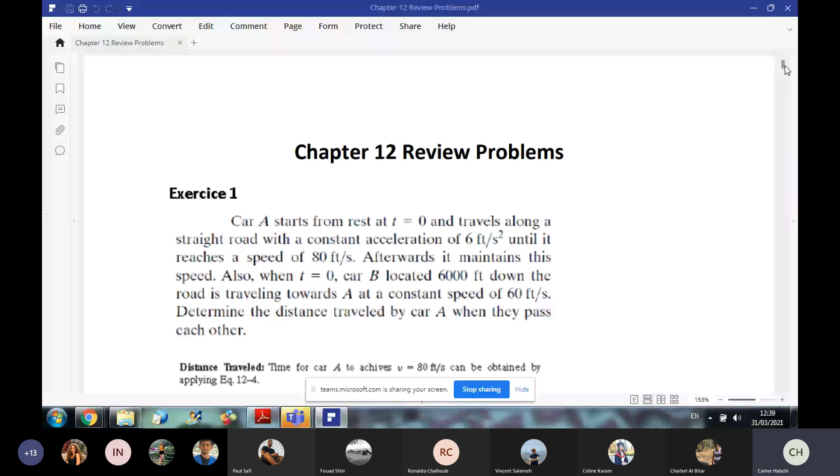So I will repeat the problem because we had a problem in connection. The screen was not sharing. So I will repeat in brief what we did last time. So we were doing problem 10.

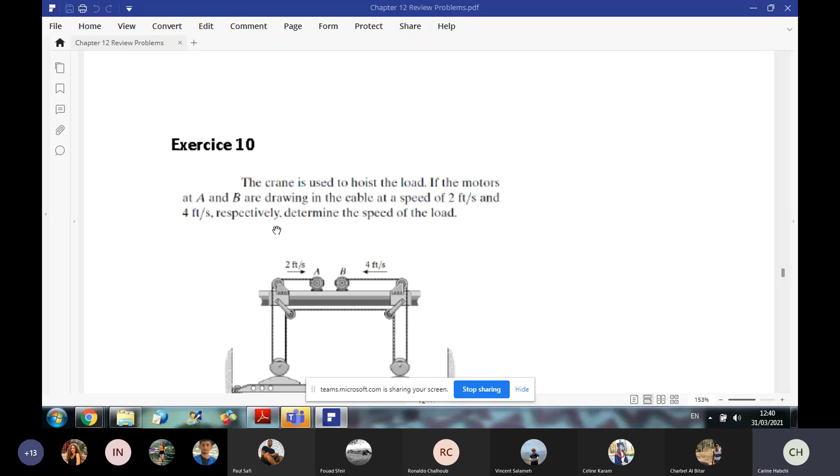The crane is used to hoist the load. If the motors at A and B are drawing in the cable at a speed of 2 feet per second and 4 feet per second respectively, determine the speed of the load. So here we have a system of pulleys with their cables, okay? And we have two motors drawing the cable in, motor A and motor B.

So here we need several coordinates. First, whenever you have a motor, you need one coordinate for the motor. Since it's drawing the cable inside, I will take the coordinate from a fixed reference towards the motor. Then this coordinate will represent the length that is going inside the motor. And I need also a coordinate for B, SB, to give me the length that is going inside motor B.

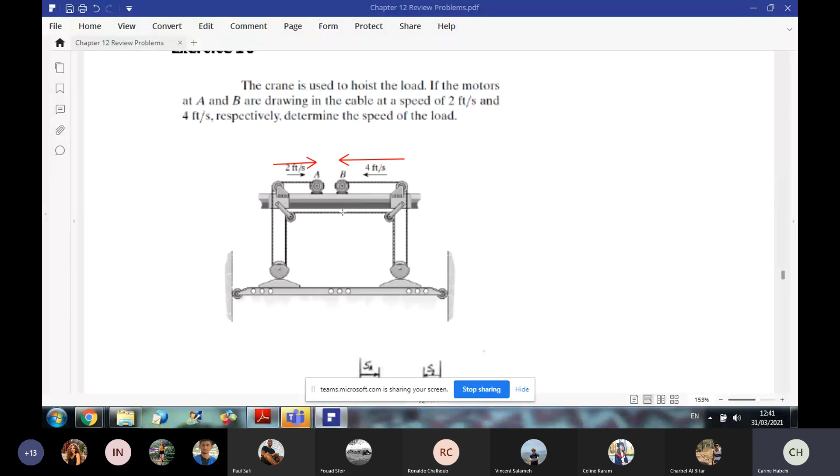And for the load, I need a coordinate. So I will take this coordinate for the load, okay? And I will name my coordinates as S of A, S of B, and for the load, I will call it C. So this is S of C, okay? Now, if I want to find the total length of the cord, I will express it as a function of my coordinates, and I will lump all constants in one term.

So the length that is rolling in the motor, this part, is SA. So first I will write SA plus... this part is a constant, so I will keep it with the constants. This is SC. This is a constant. This is SC a second time, so here I have plus 2SC. This part is a constant. And here I have SC again, a constant, and SC a fourth time, so I will update the coefficient. It is plus 4SC.

And this part here is a constant. And finally, I have this length plus what is going inside the motor. This is SB. So plus SB equals a constant. Now, once I derive this relation, I can get a relation between velocities and a relation between displacements. Because as we have seen last time, if you derive this relation, what do we get? Let us see the equation here.

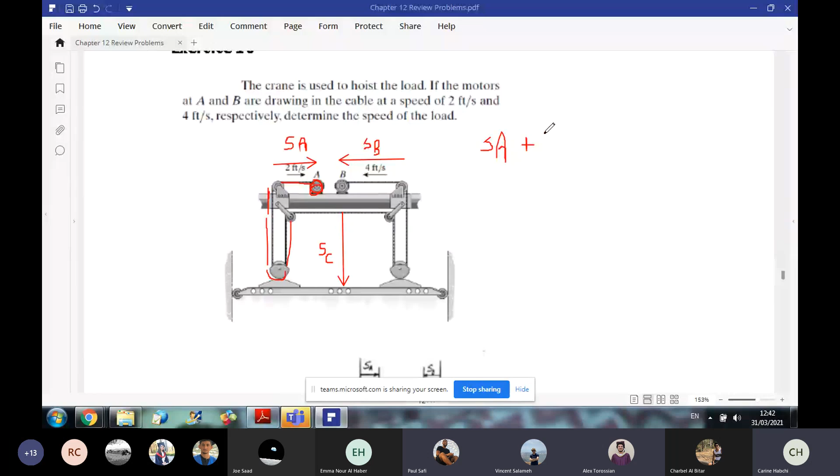Do you see the screen now? Yes, we can see it. Please, the student who has my number, can you reply on WhatsApp, please?

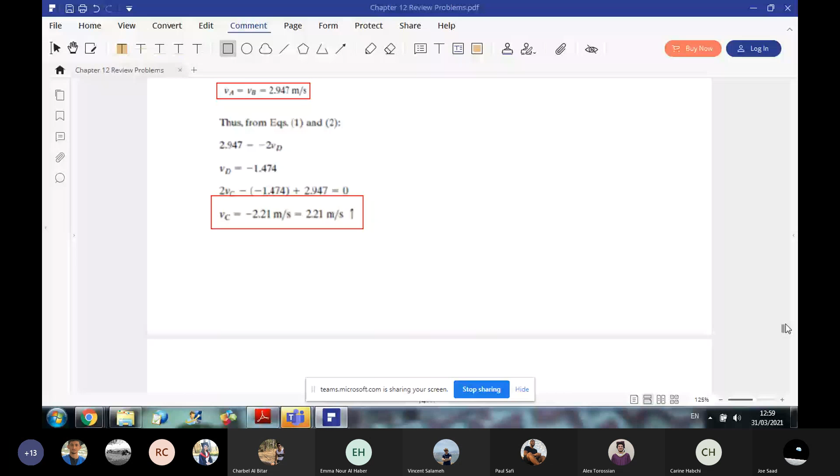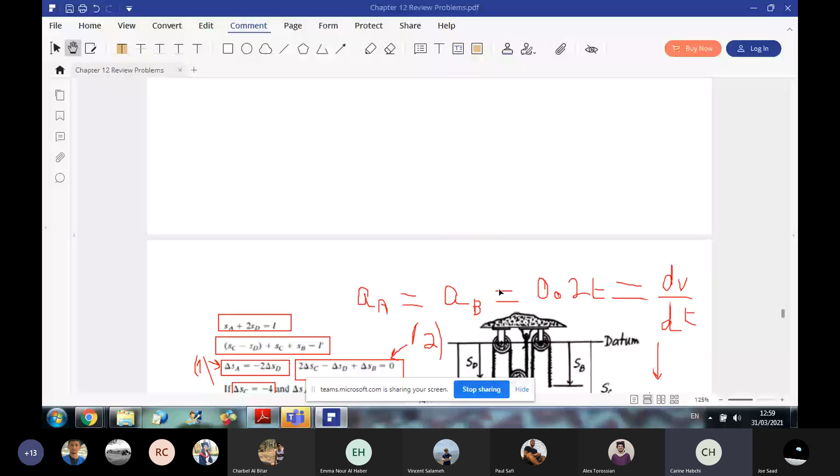So I will re-explain. Okay. So here we said that we have two cables, okay? And we need to find the time needed to have the block up, okay? So in this case, the first step to do is to write the total length of the two cords. This is the first cord here. Last time we have done this in detail, but I will repeat in brief.

So you need one coordinate for A, one coordinate for D, one coordinate for C. C is attached to the block, so they will move together, and one coordinate for motor B. This is the first cord if you follow the mouse. So from here to here, you have SA. This is a constant, this is a constant. And also this part is constant. So first SA plus this part here is SD.

So until now I have SD. Then I have a constant. And this part is SD plus constant. So in total for my first cord, which extends from motor A to the ceiling level here, the total length is SA plus 2SD equals a constant. Okay? Then I will repeat this for the second cord.

Starting from here, this distance is SC minus SD, because this part is the whole part, which is SC, minus this part, which is SD. So I have this length is SC minus SD plus this part, which is SC. So until now, I have 2SC minus SD, then I have a constant, then I have SB. So in total, 2SC minus SD plus SB equals a constant.

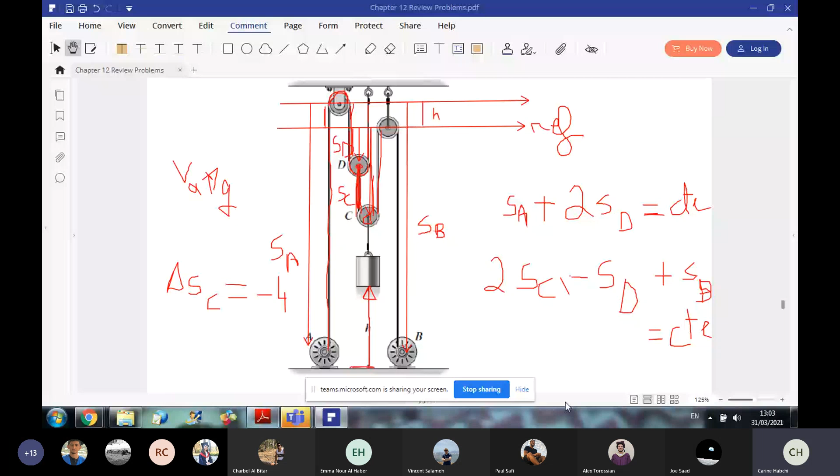Okay. So this is the second cord. From the second cord, if we derive this relation, we will get 2VC minus VD plus VB equals 0. And for displacement, we get 2 delta SC minus delta SD plus delta SB equals 0. Now, in the next step, once I get these relations, I will use what I know. They told me that the block will rise up a distance of 4 meters.

So initially, my block was at the ground level, okay? And by operating my motors, the block will be lifted upward a distance of 4 meters. Since it's lifted up and SC is downward, delta SC will be negative. So delta SC is equal to minus 4. And they told me that the two motors are operating from rest at the same acceleration. This is why, since aA is equal to aB and both start from rest, delta SA will be equal to delta SB.

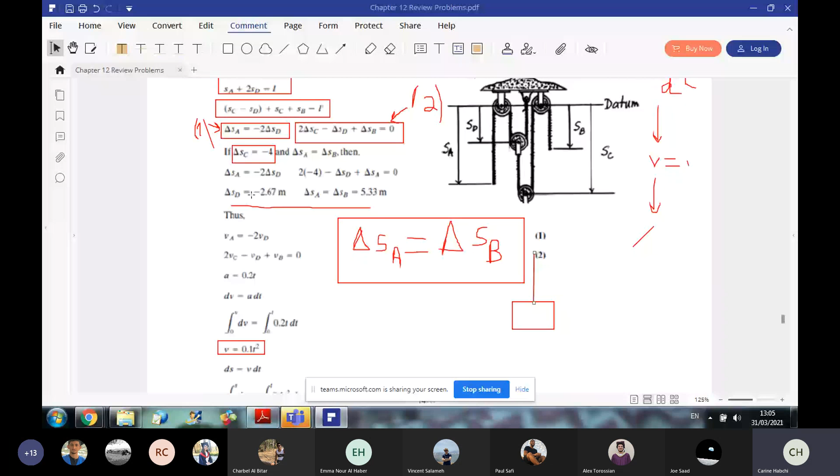Now, by replacing delta SC in equation number 2, and by replacing delta SA by delta SB in the two equations, we will end up with two equations with two unknowns. We can get the values of delta SA and delta SD. So once we solve for all delta S, we can go to the second step in order to get the time needed to do this operation.

You know that acceleration of A equals acceleration of B equals 0.2t. If you integrate this relation, you can get the equation of velocity, because V is the integral of a dt. So you get V is 0.1t squared plus V0. Since it's starting from rest, V0 is equal to 0. Now, once we have the expression of velocity, we can integrate this relation again to get the position with respect to time.

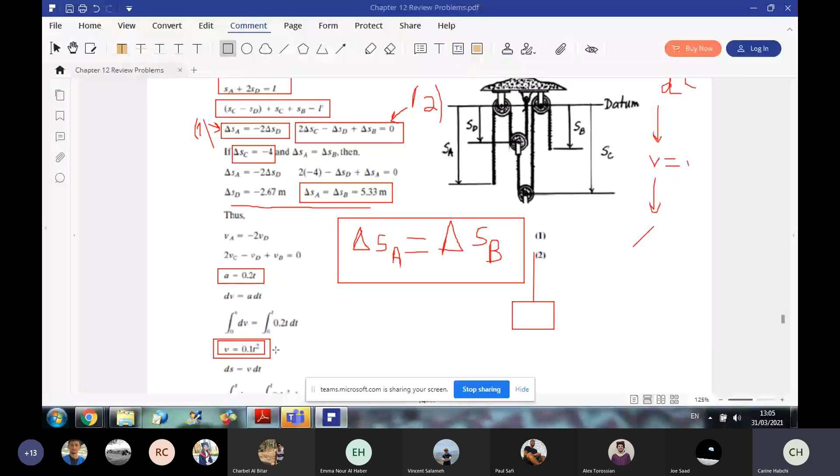So if we integrate this relation, considering that S is 0 when t equals 0, you get that S equals 0.1t cubed over 3, which is equal to 5.33, which we calculated in the previous step. So now, this equation will allow you to calculate the time needed to lift the block 4 meters. And also, they want you to find the velocity of the block at this instant.

So after finding the time t, you insert the time into the equation V equals 0.1t squared. Just pay attention, this is V of A or V of B. So once you find VA and VB, in order to calculate VC, you will go back to your system for velocities. The system for velocities will give you that by replacing VA and VB by their values, you will end up with two unknowns, which are VC and VD. So the solution of this system will give you the velocity of block C at this instant. Okay?

Block and what will be its velocity. And also, as expected, we will get a negative result for VC because the block is rising upward, while V is positive downward, since SC is positive downward. Okay? Any question on this problem? So let me check your chats to see if you need anything.

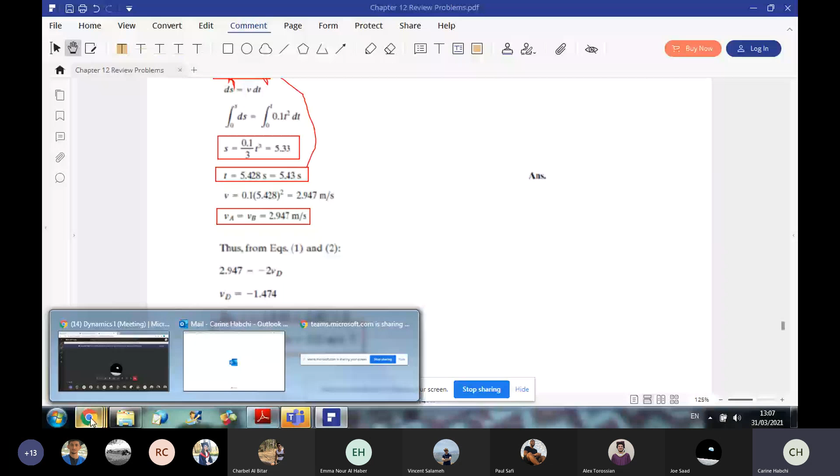Okay. Mark, concerning that, I'm giving several online lectures and I'm using Zoom, for example, and it's not happening. This is not happening with me. So I don't know what the problem is. Anyway, I will check it after.

Now, do you have any questions for this problem before we move to another one? Okay, so I will start with another problem. So now I switched to the screen. Do you still see the screen? Joe, please just tell me if you see it now.

Okay. So a car A travels along a straight road at a speed of 25 meters per second, while accelerating at 1.5 meters per second squared. At the same instant, car C is traveling along the straight road with a speed of 30 meters per second, while decelerating at 3 meters per second squared. Determine the velocity and acceleration of car A relative to car C, and the velocity and acceleration of car B relative to car C.

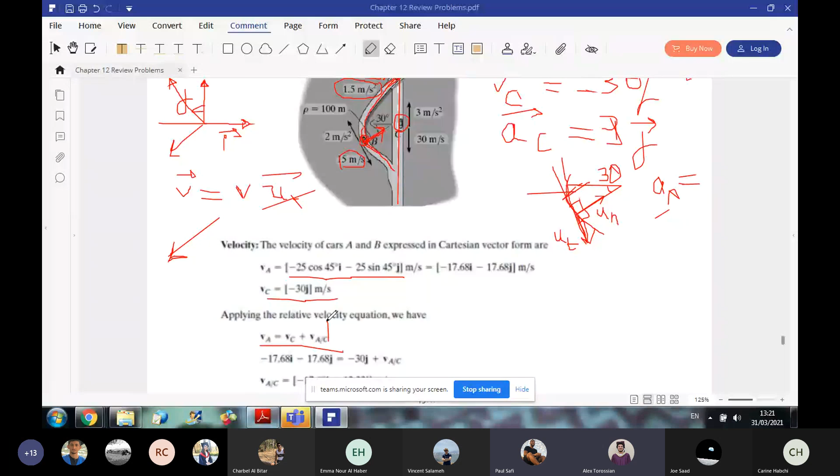Do you hear me now? Okay. Yeah. Look, when I finish this problem, we will switch to Zoom, okay? Yeah, just because, let me finish it and we switch to Zoom. Because it's very bad here. Okay. So do you see the screen now, Joe? Okay. Yeah.

So we have for the magnitude, it is radical, as we said. Now concerning the direction, it's a negative component along i, positive component along j. So it will be like this. Okay. This is the vector. And in this case, I can find the angle with the horizontal here.

Here's the angle theta with the horizontal as tangent inverse of the absolute value of the y component over the x component. Okay, because this length is 12.32 and this length is 17.68. So the angle theta will be tangent inverse of 12.32 over 17.68. Okay.

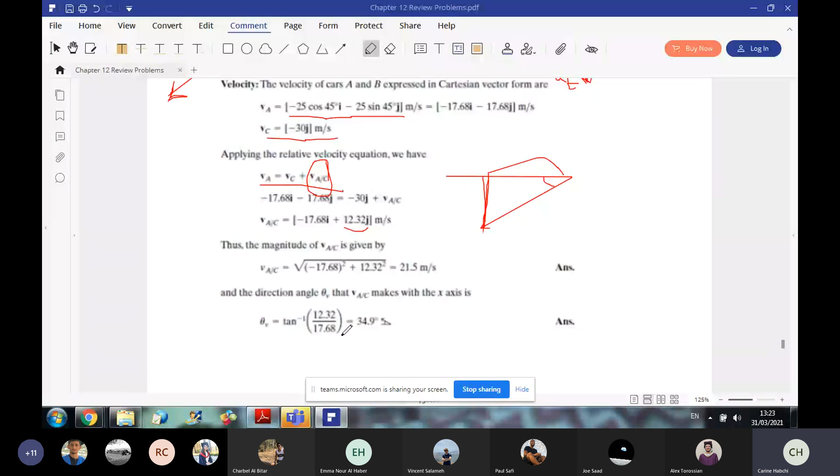Yeah, just 1 second. I'm sharing again. Do you see the screen now? Yalla, we will finish this problem and switch to Zoom. Do you see the screen now? Joe, do you see it now?

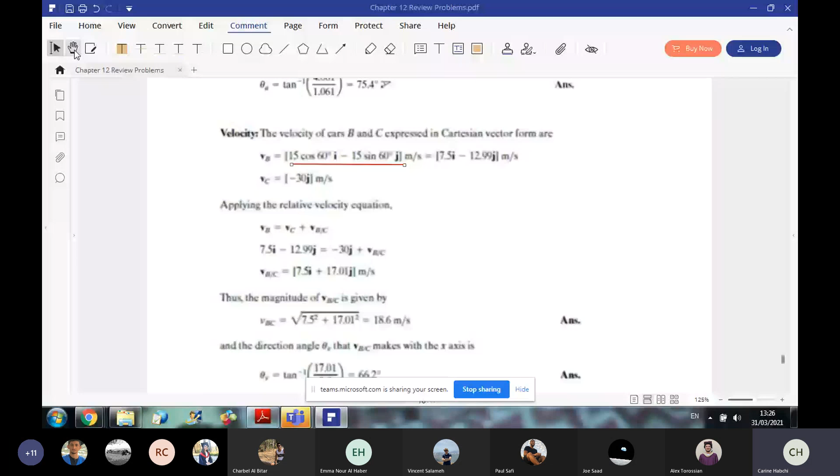Okay. So this is the velocity of B. Concerning velocity of point C, it is already calculated. So we can calculate vB relative to C. We still have acceleration of B relative to C. And here, as we said, we should pay attention that B is moving on a curve. So it will be decomposed into tangential and normal acceleration. The magnitude of the normal acceleration is given by v squared over rho.

And concerning the decomposition, aB tangential is along uT, but negative uT because it's opposing the velocity. This is why aB tangential is minus 2 uT. And since uT is cosine 60 along i minus sine 60 along j, then aB tangential will be minus 2 cosine 60 along i plus 2 sine 60 along j.

While the normal component is directed along uN, and uN makes an angle of 30 degrees with the horizontal. So aN has positive i and j components. And to decompose on i, I do the magnitude of aN cosine 30. So I have 2.25 cosine 30 along i plus 2.25 sine 30 along j. Then I get the vector aB normal.

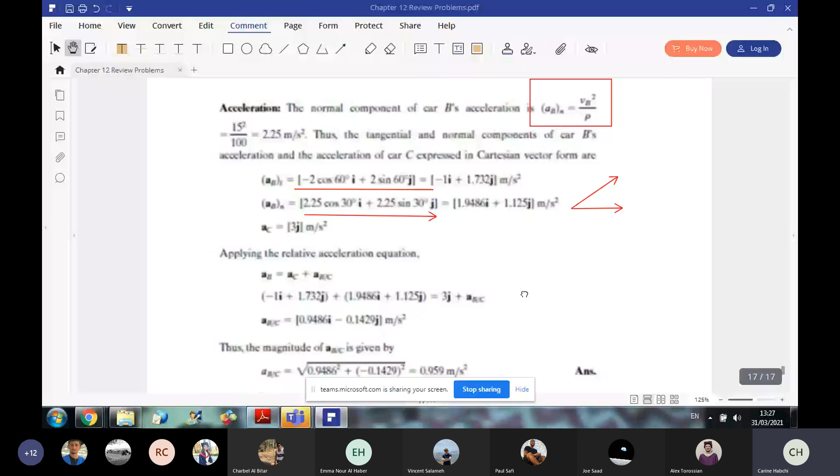And finally, once I have aB tangential and aB normal, I add both to get the total acceleration of point B. And now I will be ready to calculate the relative acceleration of B with respect to C by doing aB minus aC. Okay, so this was the last problem for review on chapter 12. I will give you an assignment on 12 to practice more during the vacation. And now we will start a new chapter.